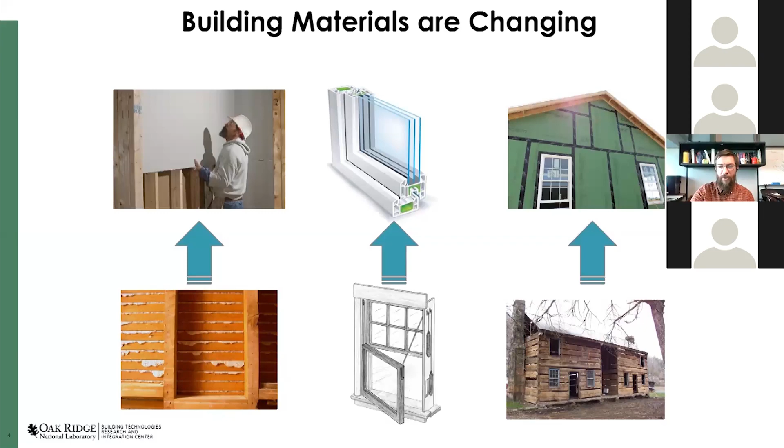Since air conditioning started, we try to keep that conditioned air in and not let the outdoor air in, to save energy and also provide comfort. So we've added thermal insulation to the walls, we've also added air barriers even more recently to keep the air we've conditioned in to save money, and we've also added vapor retarders to one side or the other of the wall. As you combine all these things, you can have things happen that you didn't quite plan for. So this is the aim of the tool: to help builders decide what components should go where in a wall, and how to build them in both an energy efficient and durable way.

Another motivation for this tool is that there are more people out there who can investigate a house and determine problems with it. You have inspectors, home energy raters, and new tools they can use to see inside the wall and see what's going on. For example, an IR camera can show where the thermal breaks are in a wall, which gives you insight into the construction, how well the building was constructed. So people are watching, and people can see a builder's work.

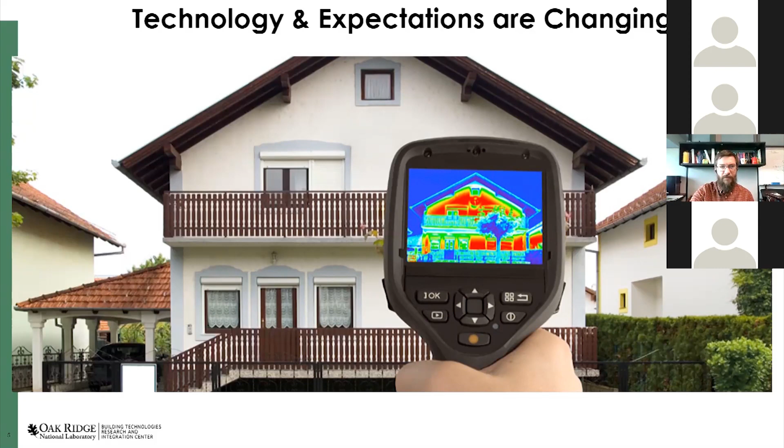Also, with the internet age, people can complain about any work done on their house, and others can go and read this. So this is definitely something we want to avoid, and the way to do that is by building walls that work.

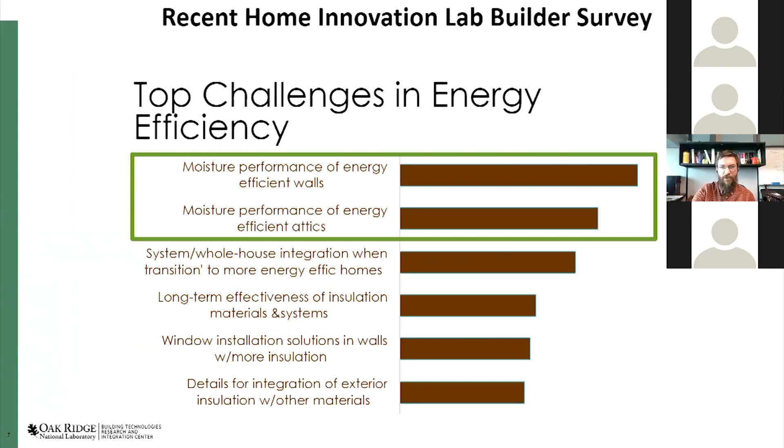There's also been a recent poll by Home Innovation Lab, and they asked builders what their top challenges were as they try to build code compliant buildings that are energy efficient. You'll notice among the top two dealt with moisture performance, both of walls and attics. This is of critical concern. As people build energy efficient walls, they realize that more attention needs to be paid to make sure that they're durable.

So how do we help manage this risk? We provide accessible educational information for designing durable, energy efficient buildings. That's the aim of the Building Science Advisor. There's a URL link here that you can go and play with the tool. Now I'm going to tell you about the tool itself and how it works.

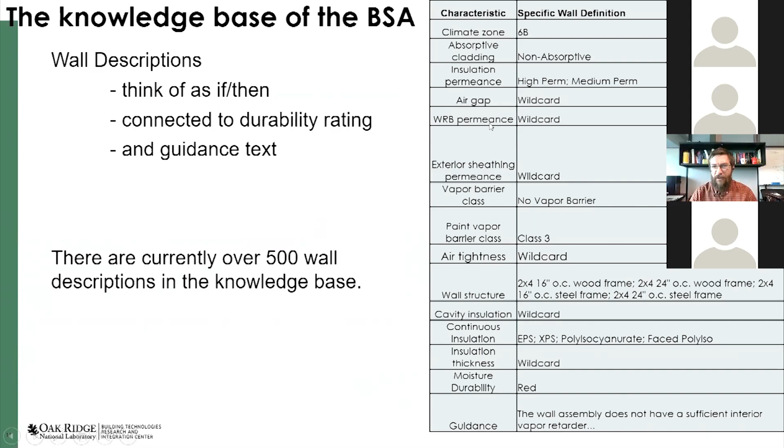If you notice, sometimes the characteristic is marked as a wildcard for this particular description, which means that it doesn't matter what the user entered for WRB permeance, for example, it'll still match on this rule. You can also see there's sometimes where there's more than one input, for example, for wall structure. So any 2x4 construction, whether wood or steel frame, would match on this rule.

So we have a question from the audience on this section. Hector Albrecht would like to know, for this tool, would you be able to select exact manufacturer components? No, we don't have exact manufacturer's components. It's more general within a category. So we don't have any trademark products or anything like that.

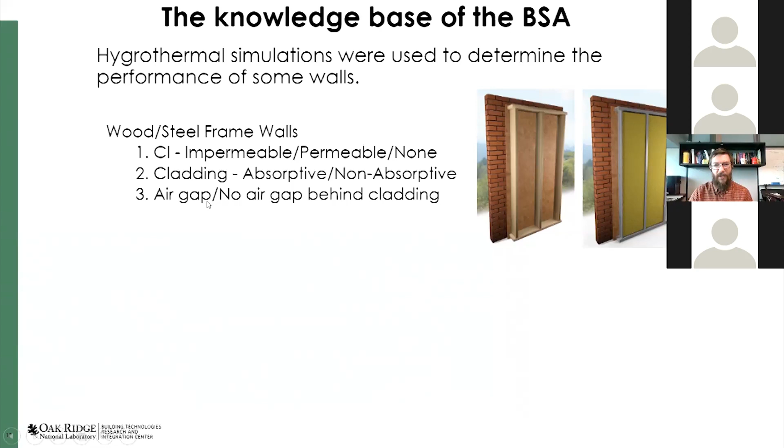Philip, a question from the audience: what different size studs can you select within the system? So there's 2x4 and 2x6, and you can also select between 16-inch on center and 24-inch on center, and wood or steel. So those are the different combinations of stud walls that we have.

We also have CMU walls that we've done simulations on to help populate the database, categorized as either internally insulated or externally insulated. As we go through the live demo, I'll walk through the different options, and hopefully this will help everyone listening understand what's going on.

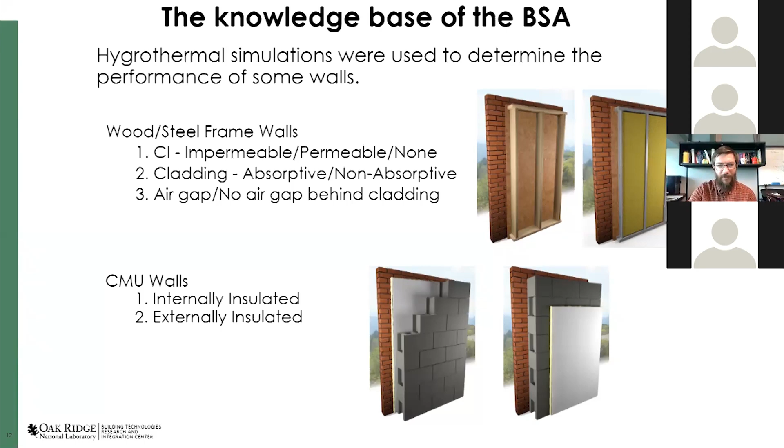There are also other rules in the database that aren't based on simulation. There are rules to make sure we're meeting certain parts of code. For example, if you're in marine climate 4, or climate 5, 6, 7, and 8—basically marine or colder climates—this triggers the class 3 vapor retarder part of the code. That's in the database as well to help users get that advice.

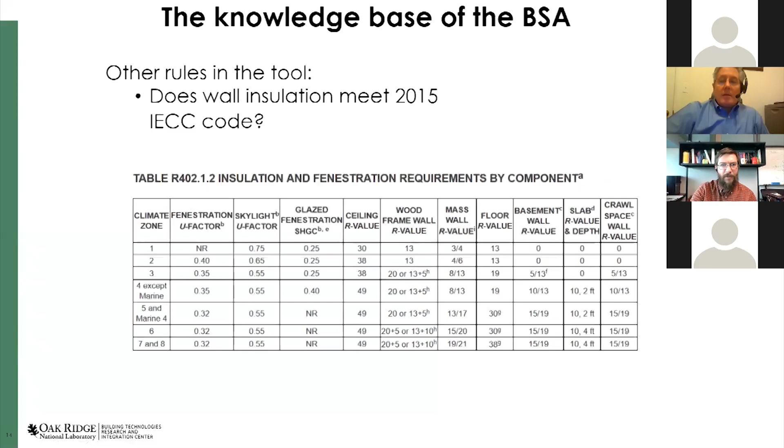Also, as I mentioned earlier, we check to see that the wall insulation meets code. Philip, for our Canadian friends, can you clarify that this is just U.S. code, although it may be transferable to Canada? Yeah, it's the 2015 IECC code that we're checking against. Thank you. Yep.

The inference engine is what connects what you've input in the tool to the database. It converts the components you input into their relevant material properties. One example is the weather resistive barrier, which is categorized into 3 categories: whether it's less than 1 perm, between 1 and 10 perm, or greater than 10 perm. That's similar for all the materials—we section them off into categories, thinking of a family of materials that all perform similarly in the wall.

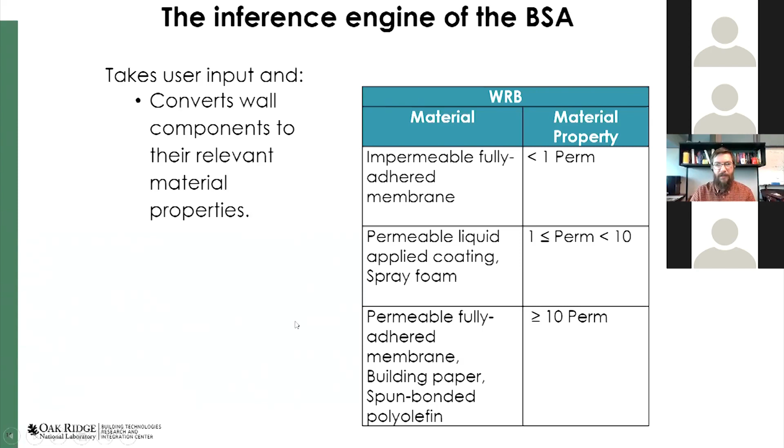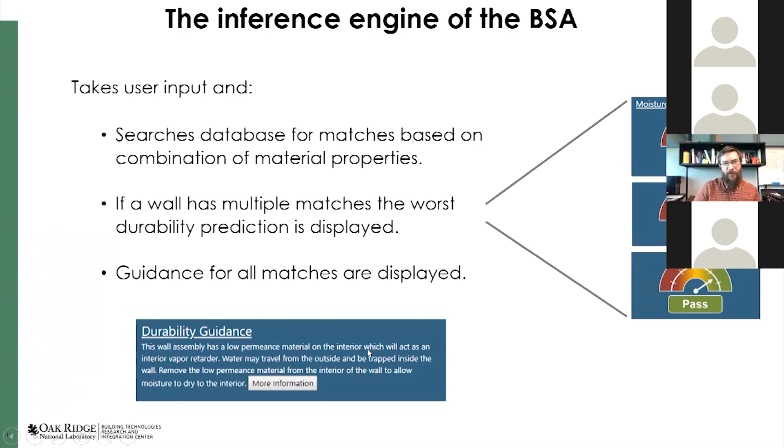The inference engine searches the database for a match and displays the worst match that it hits. The different options are: fail, inconclusive, and pass. Inconclusive means the wall could go either way, depending on a lot of different variables—for example, indoor climate. Right now we're basically taking the average indoor climate as a basis for these rules, but we hope to change that in the future, and I'll talk about that in a little bit. Then the guidance for all the matches is displayed. That's the part of the tool that will help the user make their wall more durable.

I wanted to talk a little bit about the future of the Building Science Advisor, because we are currently doing more work on it and hope to increase the capabilities going forward. Right now we're working on a retrofit path, where if you're coming to an existing building and want to retrofit the wall, a guide would help you do that. A lot of this is helping you figure out what's in the current wall, if it has moisture problems, how to fix it, and then making recommendations based on the existing wall, climate zone, and things like that, with some user input as far as how far they want to go.

Would there be significant updates, Philip, for the 2018 code? Can you say that once more, Peter? I didn't hear the beginning. Yes, would there be significant updates for adaptation to the 2018 code? We haven't talked about that yet, but we do plan on doing ongoing maintenance to the tool, so updating it to the newer codes is definitely something that I foresee being part of that.

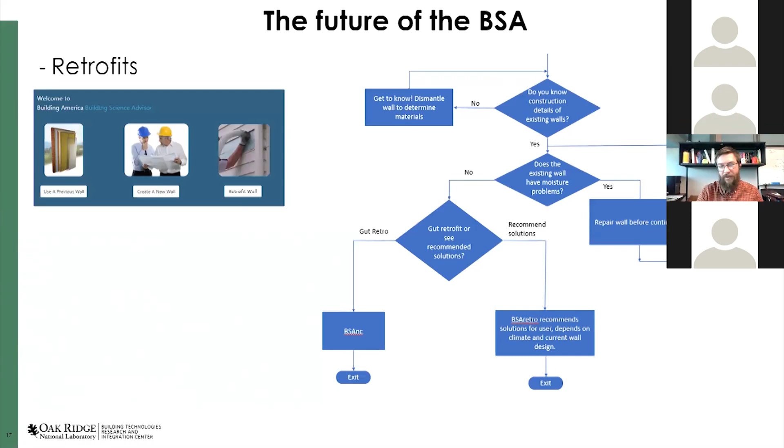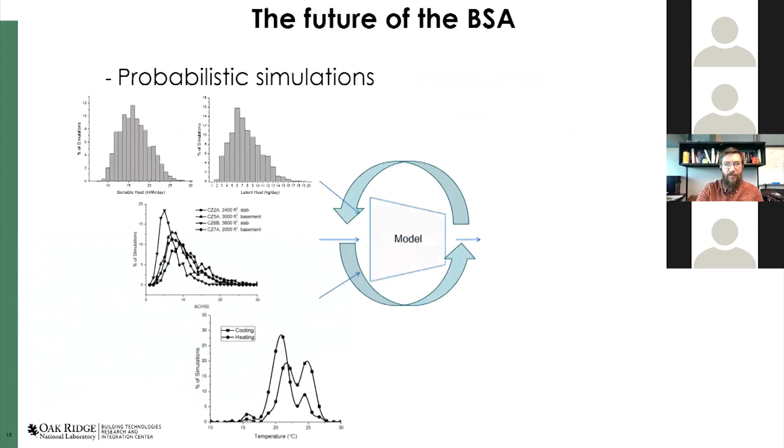Another thing we want to add is probabilistic modeling. When you do a computer model, you assume a lot of things, like single inputs. But the reality is once a wall goes into the field, it sees a lot of different conditions, different indoor conditions. It might be the same house, but depending on the family that lives there, the indoor condition is going to be different. This would take that into account, so you'd have a lot of different inputs that are ranges instead of single values, and what you'd get out is a range of performance.

As an example, there's the mold growth index. A wall with a lower number is better, a higher number is not good. If you have a wall where most of the time it's between 0 and 1, it's a lot better performing than if a wall has a long tail out into the 5 and 6 range. This would really help you get an idea of how a wall would perform overall in the many different homes it could be put in.

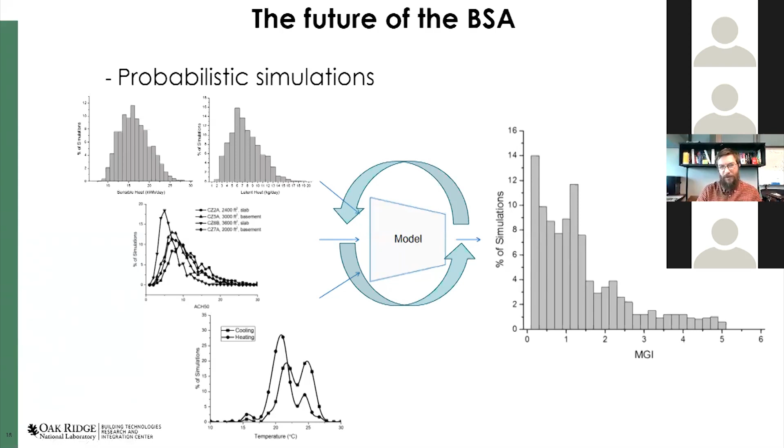Something else we want to do is add more envelope components, so have a track for roofs or a track for foundations. These are some of the things we're thinking about as we expand the tool.

That brings us to a question from the audience: what we're seeing today is for above grade walls only? Yes, that's correct, thank you. And we focus on new construction as well.

That ends the presentation part, the slides. I'm going to stop sharing this and start sharing my web browser.

You should be seeing the Building Science Advisor webpage. Once you log in, this is what you'd see. You can continue as an expert or as an educational path. The difference is that on the educational path, the help menus are all expanded, always shown. In the expert path, they're hidden, and you can click on a question mark button and it'll give you the help if you want it. We'll just go down the expert path since it's easier to see on a single screen.

As a user, all your previous walls that you built up are saved, so you can go back to one of those and continue playing with that, or you can create a new wall. We'll go ahead and create a new wall. The first thing you come to is what climate zone you're going to build in. We'll pick a cold climate here, and then the map's highlighted to show you where you've selected.

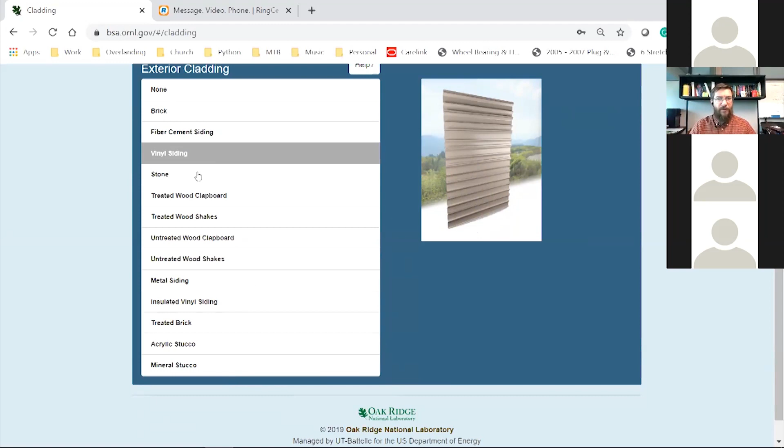Next is the cladding for the wall, and you'll see many different options here. Again, none of them are trademarked to a certain company, but more general categories—brick, cement siding, vinyl, etc. We've categorized these into two groups, whether they're absorptive or non-absorptive. An example of absorptive would be stone or mineral stucco, and we'll click mineral stucco here.

If you go to structure, that lets you pick the sheathing as well as the structure of the wall. Here we'll stick with OSB, and we'll go with 2x6, 16 on center wood frame wall. You can see some of the other options here—other framed walls, wood and steel, SIP panel walls, and CMU walls.

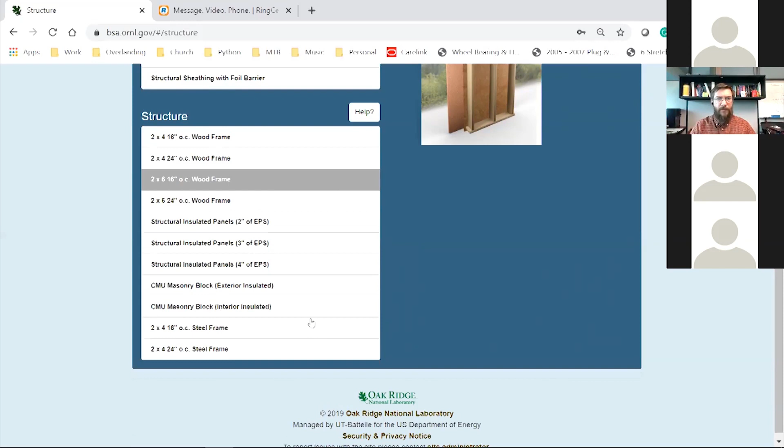After that, we're on to the insulation of the wall, and you can select continuous insulation and cavity insulation. For continuous insulation on this wall, we'll select EPS, and then you have a drop down for continuous insulation thickness—we'll pick 2 inches. For cavity insulation, you also have a lot of options: fiberglass insulation at different R values, cellulose loose fill, some spray foam, flash and batt, mineral wool, etc. We're just going to do fiberglass batt, R21 because we're in a 6-inch wall.

Next is the outboard weather control of the wall, and we will select none for this demo, and for the WRB, we'll select a permeable fully adhered membrane.

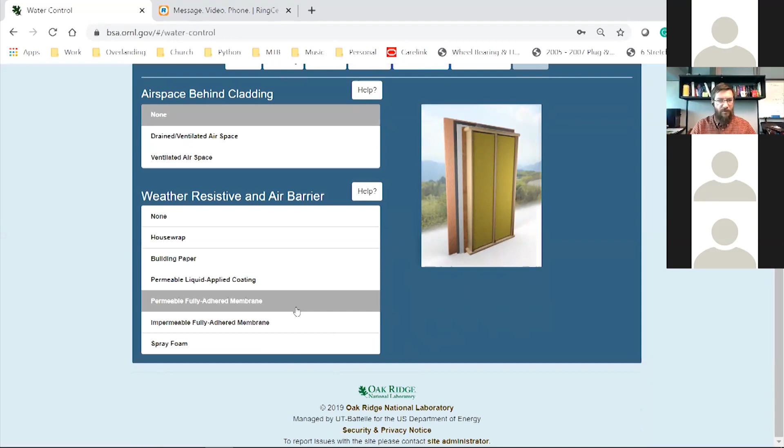Finally, you come to the interior side of the wall and look at the vapor control there. We'll pick latex paint, and for vapor retarder class, we'll pick poly sheet, so a vapor barrier on the interior side. Then you can pick the expected air tightness—currently, the only thing this selection does is tell you whether you're code or not for the air tightness.

And then once you're done, so we put in all the wall components that we plan on using, we go to results. This first off is telling us that this wall will fail from a moisture durability performance aspect, yet it does meet code as far as thermal insulation goes.

If we go down here to the durability guidance, we're told that the wall can absorb water because of the absorptive cladding, and it tells us that we should put ventilation behind the exterior cladding. And then it has this button for more information.

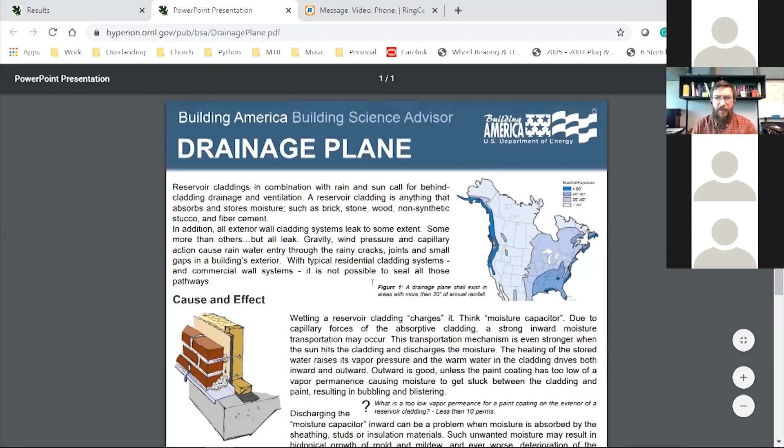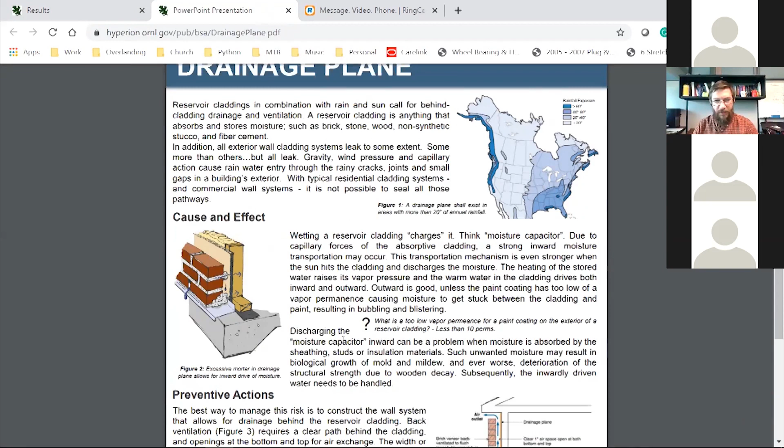If you click on the more information, it brings up a PDF that is really meant to help educate the user. So what you have here is a section on what the issue is, and then if it stays like that, the problem that it could create, and then preventative action. So how do you stop this from happening?

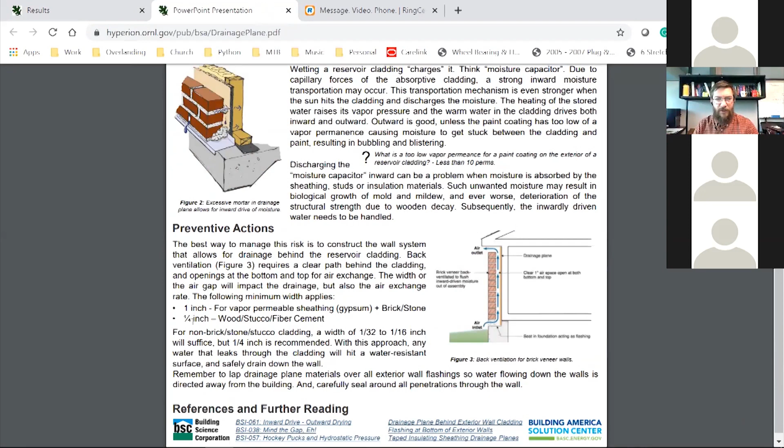So the recommendation is for an air gap, and this gives you some information about recommended widths for different wall designs. So if we go back to the Building Science Advisor, if we take this information and say we want to put an airspace, then the wall passes. So this gives you an idea of how the Building Science Advisor works.

I'm going to do one more wall to show you just another example to help you understand. Again, we have some questions from the audience that you may want to cover on this second wall. These are mostly around some of the choices available.

We have the question: can you select only one cladding at a time? Yes, you can only select one at a time.

Does this tool have metric units? It doesn't currently, but that's come up before, and that's definitely something that we can add.

Is EIFS listed as one of the wall choices? That's a good question. If it's not, you can basically trick the tool to have that. We'll look at that as we go through.

So a couple more questions about the wall. What about a double stud wall? We don't have that option, but we have had a request for it before.

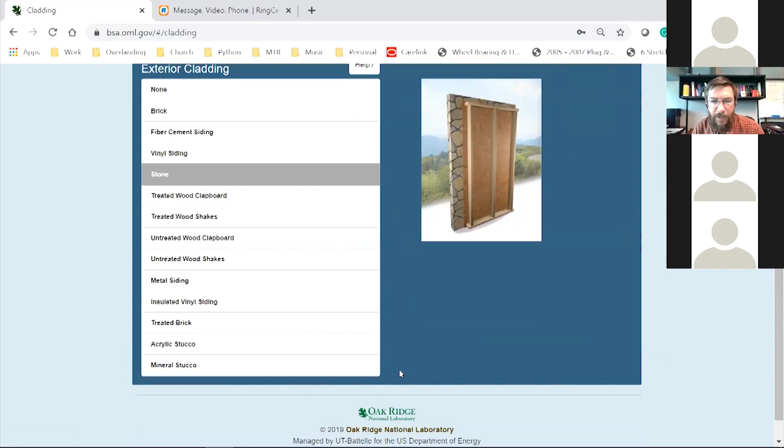So for the EIFS, you can pick mineral stucco, which would roughly give you the same. So mineral stucco without an air gap would probably give you the same results.

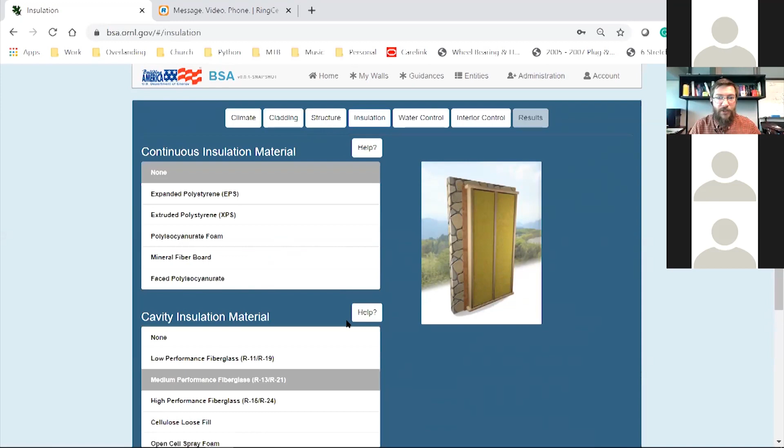So if we go to structure, we'll stick with the OSB as well, but we'll go with a 2x4 wall, 16-inch on center. For insulation, we will have no continuous insulation for this one. We'll stick with the medium performance fiberglass, which would be R13 in this example, since we're a 2x4 wall.

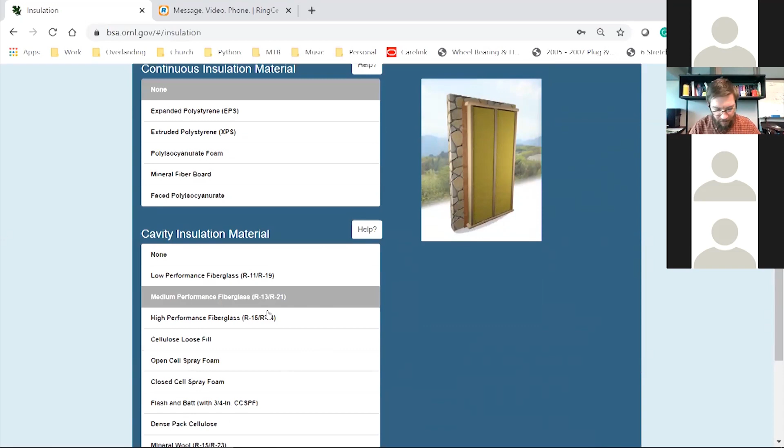And then for water control, we'll pick none again. For the WRB, we will stick with the permeable, fully adhered membrane. And then for the interior control, stick with latex paint. We'll go with kraft paper for the interior vapor retarder, and stick with the three air changes per hour.

We'll go to results. So again, we see this wall fail, and then it's below code. So this guidance is a little different. It says, again, that it can absorb moisture, but it gives us some other options to fix it. It says that you can add continuous insulation and or add an air gap behind the cladding.

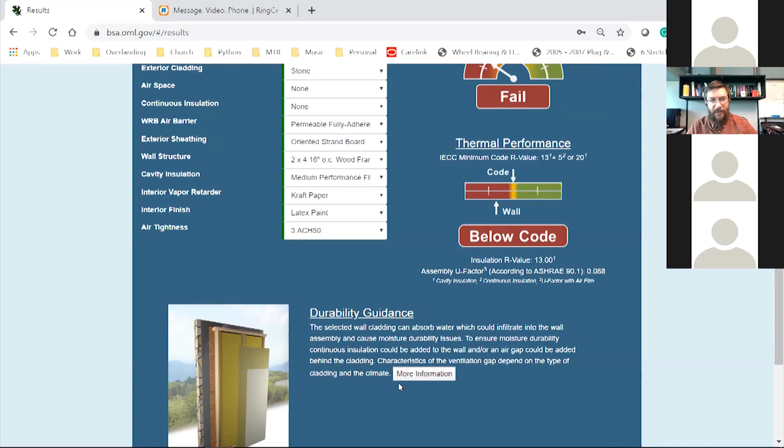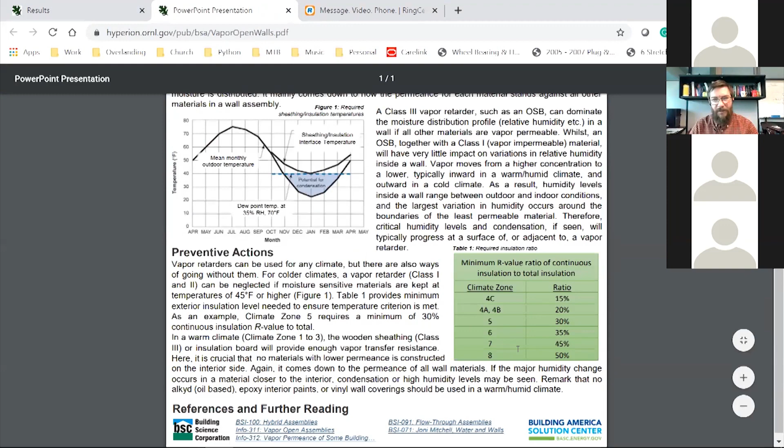And so again, there's another PDF that you can click on, and it brings up a discussion on vapor open walls and how to design those in a way that works. If you go down to the preventative actions, it talks about having a certain ratio of continuous insulation on the outside to keep the inside of the wall warmer so that you don't get condensation there.

So if we take that advice and add continuous insulation, we'll add 2 inches. And there you see, now we meet code, and we also pass from a durability standpoint.

So that is the end of the live demo part of the Building Science Advisor. I hope that gave you a little taste for what's there. So I invite you to go and play with it. If you find something that you'd like to mention, you can go down to the bottom, and there's a place where you can email the site administrator. That comes to us, and so we can investigate any issues you might find.

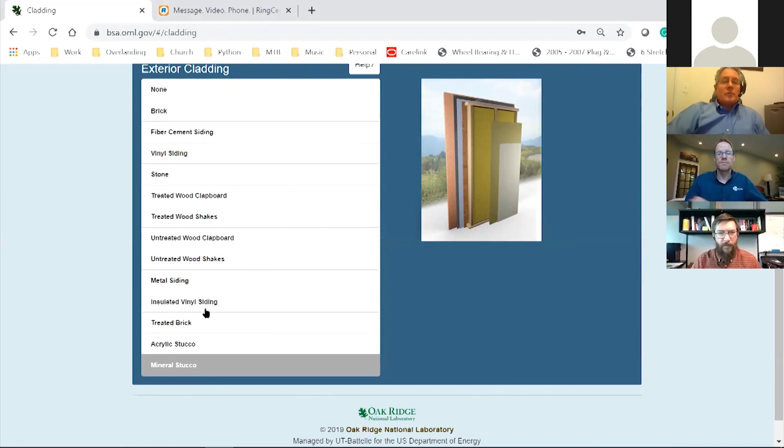As I mentioned, for the cladding, there's really two groups: absorptive and non-absorptive. Typically with all these materials, if you have one, it might perform similarly to one of these others, even though your particular material is not listed. One reason I wanted to mention the way we group things is because that can help you decide what to pick as a surrogate.

Typically here we have things that absorb water, like brick, and things that don't, like vinyl siding. For structures, yeah, someone mentioned double stud, so that's not here. We really tried to focus on the majority of the market, which is wood framed walls in the U.S.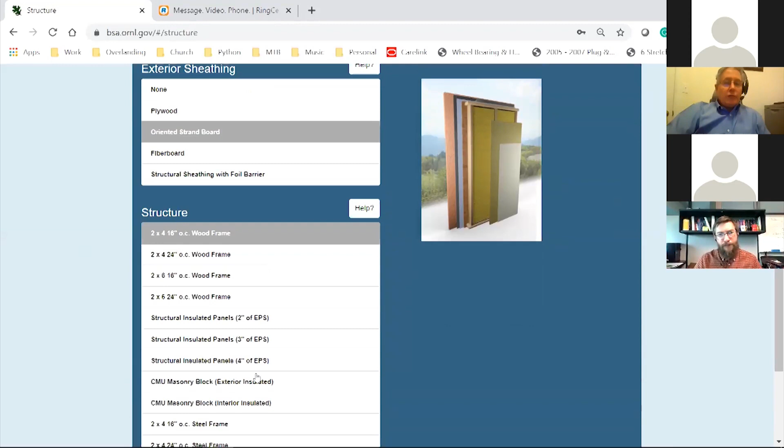Are you able at all to reorder the layers, or are the layers fixed in the tool? The layers are fixed in the tool. You can't reorder them.

Maybe I'll just click through and talk, and if there's a question that hits one of these, you can mention it, Peter. So for continuous insulation, yep.

Philip, I see one of the questions that came up from the audience was, does using rock wool need an airspace? You want to take that one, Andre?

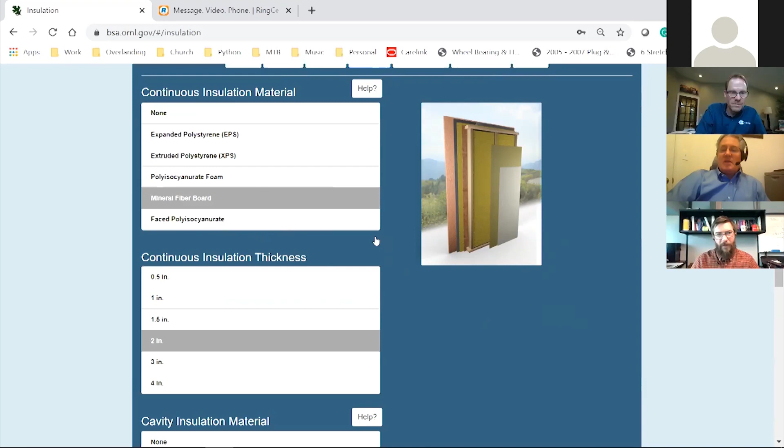Oh, we lost Andre. Yeah, so if you go to insulation, that would be the most permeable continuous insulation available on this list. As far as vapor control, you basically don't have any of it with that continuous insulation. So depending on your climate, if you need exterior vapor control, you'd want to add it in some other way. And like Gavin mentioned, having the airspace will help all around - any bulk water that does get in, it'll help. If there is a way for the air to somehow go through that mineral wool, that will help from a moisture perspective, but not so much from a thermal perspective.

If Andre, if you're back, feel free to chime in. Well, I have to remember to unmute.

I think that question is the perfect type of question as to why we created this tool. You don't need to ask an expert that question - once you develop confidence in this tool, it will answer that question for you. So the answer, of course, is it depends, and it depends on all of the other layers and where the building is. But that's the exact reason why this tool has been constructed. You can look at the use of rock wool either as continuous insulation or as cavity fill or as both, in any climate with any combination of water resistant barrier, any combination of interior moisture control, and come up with a recommendation of whether or not it will create a durability problem or not. So thank you for asking that question - that's a loaded question, but that's exactly why we developed the tool.

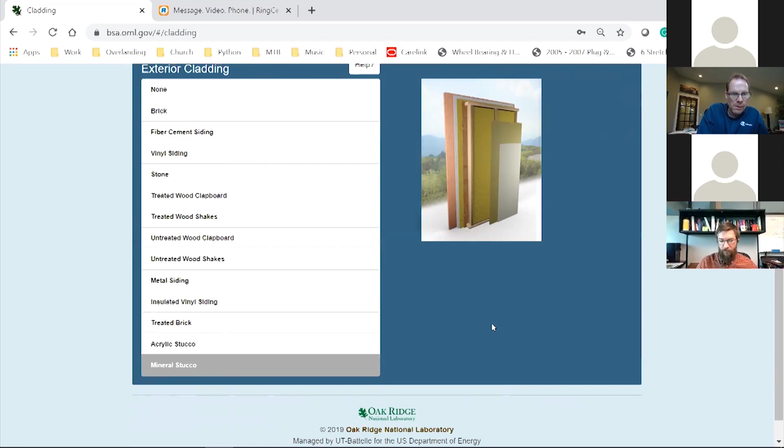So no, we don't currently have an open joint cladding option. Yeah, and that might be something to consider. Open joint cladding is almost like having no cladding, and you're getting your rain being deposited on whatever is behind the cladding, which I presume is a water resistant barrier.

The tool doesn't capture that right now. You could put no cladding, but what's going to happen is the tool will assume the solar and all the other impacts are striking the water resistant barrier or the next layer into the wall. And that's probably not a fair way of assessing the wall performance. So I think Philip is correct in that. Right now, I'd be a little nervous about using this tool for that type of cladding system.

Another question I see here is, are we able to take into account mechanical versus adhesive when it comes to an EIFS type system?

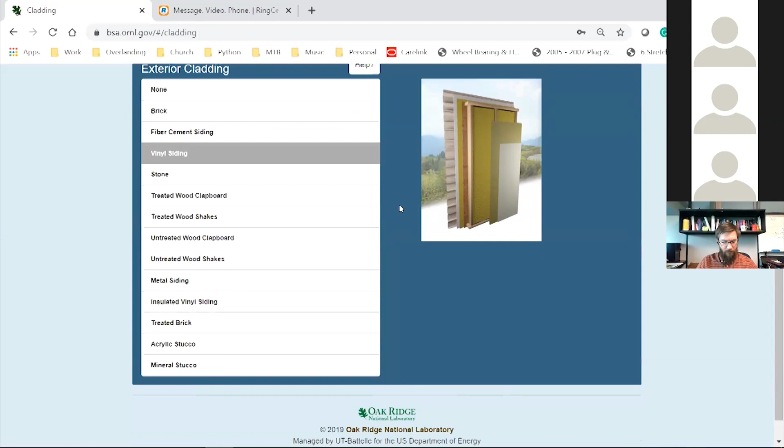Right now, no. The inputs in the database right now are primarily those that impact the moisture performance. And I guess you could argue that whatever you're using to adhere the insulation in an EIFS system, that layer could impact the moisture permeability. But right now we don't capture that difference.

That's not captured. There is, when you go to CMU and look at the different claddings you could put on that, there are some rules that will make a note if you have metal fasteners, you need to watch out if you use certain systems that they may rust and things like that. But other than that, it doesn't affect the durability rating itself.

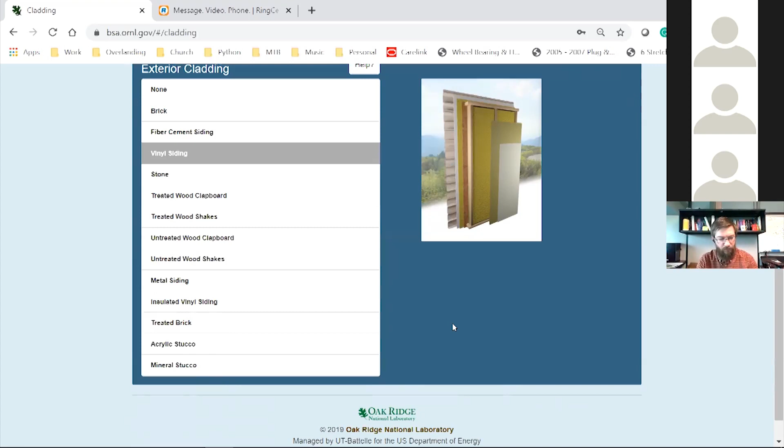Oh, I got my audio, but not my video. There we go, I thought it was from another attendee.

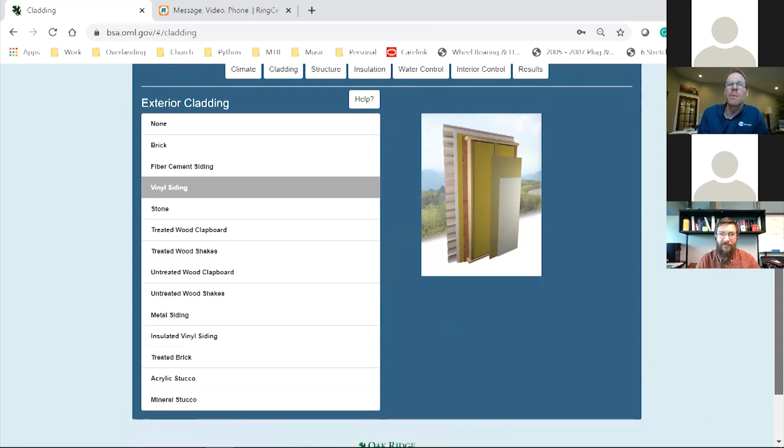Adam asked, does this program have limits that don't allow someone to create a wall assembly that isn't buildable? For instance, adding more than 4 inches of insulation into a 2x4 assembly. I don't know that, Philip.

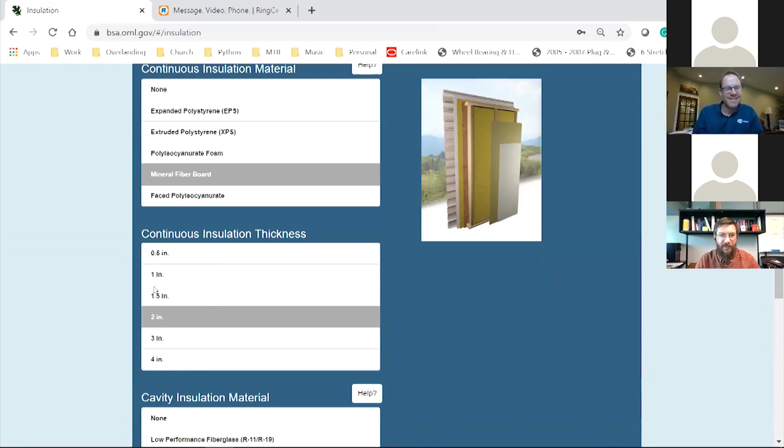How foolproof is it? So just to clarify, the thickness here is for continuous insulation, that's not in the cavity. These are defaults, giving you either 3.5 inches or 5.5, if you're in a 4-inch or 6-inch stud.

However, you could probably build up a wall that you wouldn't want to build in real life. Whether one that's impossible to build, I don't know about that. I haven't tried. Hopefully we're all good enough at knowing what we want to build before we get on here.

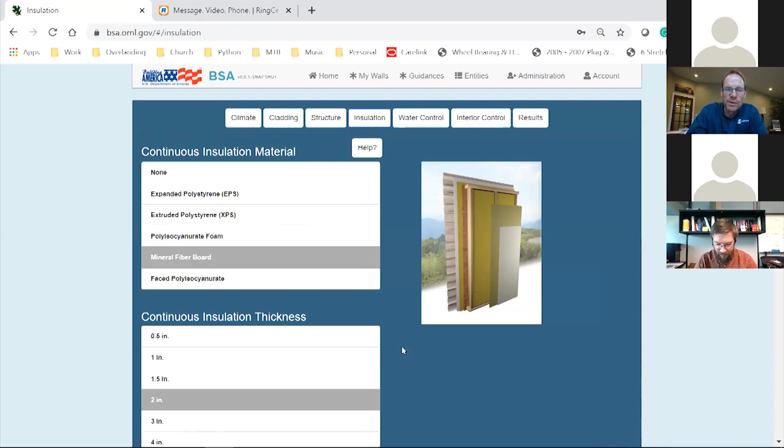I thought this was another question I was asked: would this be helpful for clients reviewing costs? Because in my business, just looking at competition, we're building a better wall system maybe than somebody else. I think this would be great to review with the homeowner to let them know why we're doing all the extras.

Yeah, there's no cost information built into the BSA tool. We actually had a lot of discussion about that and became concerned that as soon as we released the tool, it would be out of date. And market pressures impact the cost of systems as well. So it doesn't include any costing information.

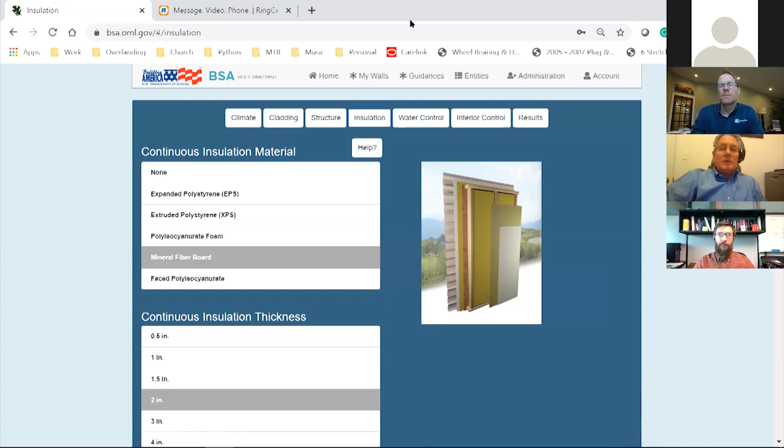I mean, you certainly can create—one of the things Philip didn't show is that you can actually create and display numerous wall systems at the same time. So for a client, you could say, okay, here I've got system 1, 2, and 3, all of these are going to work in your climate for what you're trying to accomplish. And this one costs X, Y, and Z.

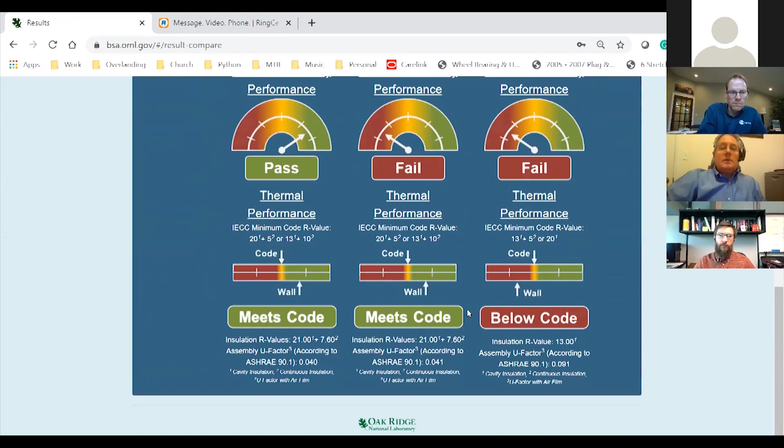So you're going to need to supply the costing information, but you can show using this screen a family of systems that are all going to perform, and then offer your own costing information for what's involved in constructing these. You're going to need to argue, since our tool doesn't really have—it's showing paths, not showing any granularity in what is more durable than another. And this is one of the benefits of this probabilistic analysis.

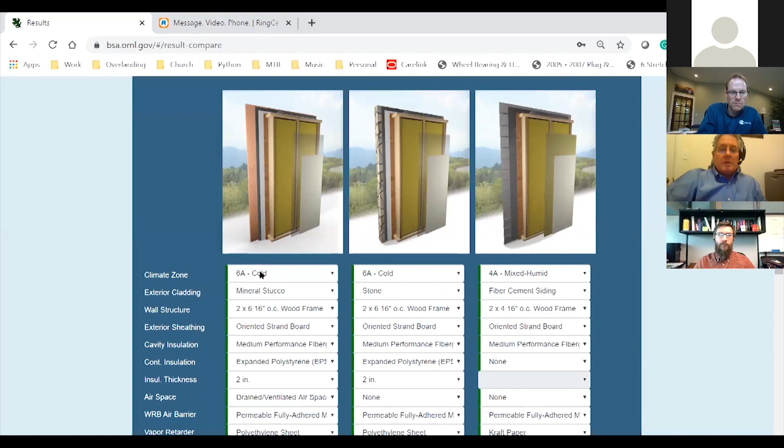What we could do when we get to that point is say, okay, if I build this, 87% of the time this is going to be fine. But if I build this other one, 93% of the time it's going to be fine. So I've got a little bit more of a durable system, but it's going to cost me X dollars per square foot to accomplish that. So, Mr. Builder, Mr. Homeowner, is it worth it? Here are your choices, here are the prices, you pick what you want.

So we hope to get there in the near future, to offer something more than yes, maybe, no, what the tool set offers right now. But even as it's configured, you can show a variety of systems that will perform and add costs, and then argue, why would you want to spend this extra money? What's the benefit of doing that? But that part is on you to get that information together.

So that brings us probably to a good wind-up question, as we're at 2 and we should wind it up shortly. But I think a good wind-up question came from the audience: is there a way to go on and be told what the perfect wall is for your building in your climate?

No. A lot of people toss around the term perfect wall, and in my humble opinion, that means different things to different people. A lot of times when you look at the designs of these perfect walls, their budgets break the bank. So is that perfect? I'm not sure that's perfect. If you can't sell something, then it's not perfect. I mean, we can build a wall system that will not fail. Let's put a quarter-inch steel plate on each side and guarantee it doesn't leak, and that's perfect. But is anybody going to build that?